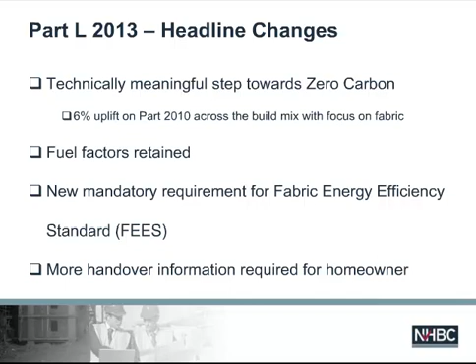With the new recipe approach, one of the things you need to consider is that we've stopped what we started in 2006, where we had a percentage improvement over a notional dwelling—then for 2010 we had a 25% improvement over that. So we were having improvements over improvements, which meant we had some fairly strange results where the same fabric specification would give a very different result depending on the type of property it was applied to. With the new notional dwelling setup, you're comparing your actual dwelling to a notional dwelling that is the same size, same dimensions, but has this new fabric spec applied to it, and that evens the playing field. So you can basically use the same specification and see very similar results across the board on your house types.

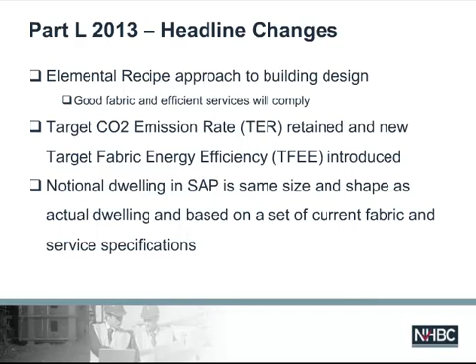So we've introduced the fabric energy efficiency standards into the 2013 regulations, first introduced by the Zero Carbon Hub as part of their minimum fabric requirements. The easiest way to think of this is it's the stuff you can't really take out of the house - the fabric, the thermal bridging, the air permeability. Things like low or zero carbon technologies don't affect the fabric energy efficient performance. That's really important to note - once you've started building your property for fabric energy efficiency, you're pretty much there. You can't have any bolt-ons later on that will help you achieve your target fabric energy efficiency. So it's really important to get your fabric energy efficiency sorted before you start on site.

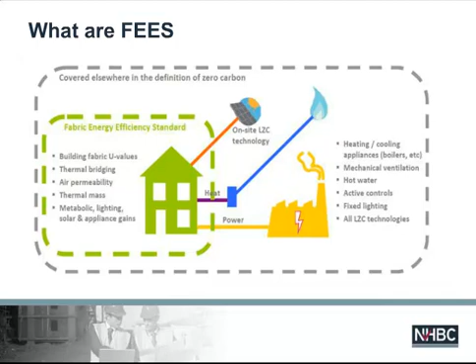In terms of the 5 criteria for compliance, we still have what looks to be a very similar set of requirements. Number 1, achieving the target emission rate. Now there is the target fabric energy efficiency, which is created from that recipe, which I will show you in a second. The limits on design flexibility, those backstops, those area weighted average U values, are still there. The wall average U value of 0.3 is still there - they haven't reduced those. Limiting the effects of heat gains in summer.

Now that's changed slightly from solar gains, meaning you do have to consider heat gains from pipe work - uninsulated pipe work that's carrying hot water. You do have to consider heat gains for that as well. Obviously, we also have the building performance consistent with the DER, and the design target fee, which falls in with the zero carbon performance gap work. It's kind of a leader into that, making sure that we are building what we said we were going to build at design stage.

And then number 5, it's the provision of the energy efficient information of the dwelling - some kind of home user guide to provide the building owner with how to use the services that you've installed.

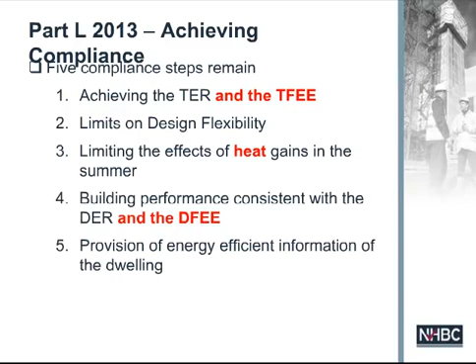So if we take a quick look at the recipe - and I know presenters after me are going to go into more detail on this - effectively there is now a recipe for Part L 2013 that if you build to it, you will comply with both the target emission rate and the target fee. You will actually slightly overperform for the target fee because there's a relaxation. So if you build this recipe, you're guaranteed to meet the target emission rate. However, you can build slightly lower specification in this recipe and still meet the target fee.

However, it does seem quite a simple thing - you just build to these U values. You do need to bear in mind that there are some very strict thermal bridging values, the psi values in Appendix R, used to work out your thermal bridging value, that if you can't adhere to, you are going to have to do something else. So if you build exactly to that recipe with your walls and windows, but your thermal bridging is bad, you are going to really struggle to comply with both your target emission rate and your target fee.

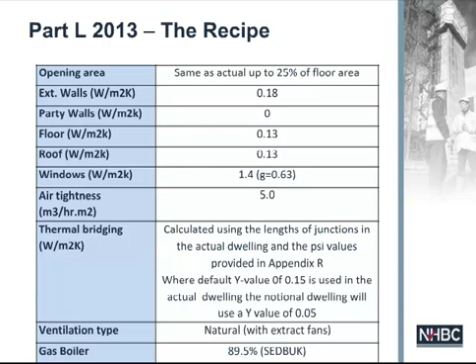So just to finish, I want to talk a little bit about thermal bridging. I'm sure the presenters after me will go into more detail, but just to cover where we are and why thermal bridging has become so important. You can see the house on the left has got the default Y value, which is where we were when we were looking at SAP 2002. The Y value of 0.15, default value - if you look at that as a hole in the wall, it's basically equivalent to a double garage door. Think about how much heat you're going to lose through default Y values. That's why it's really important.

Secondly, Y value of 0.08, that's accredited details - we are basically getting down to an open patio door, and that's where we've been for a while in the industry. But now looking at Appendix R values, we are actually closer to a Y value of 0.03 with all the Appendix R psi values. That's taking that opening, that hole in the wall, down to a small open window about 1.25 meters squared. So the challenge for you is to get that garage door down to that small window opening. And if you can't do that, you're going to have to do a lot of other things to get down to your target emission rate and target fee.

That's it from me. I'm going to hand back over to Vern now, who I think has got a poll question about the changes to Part L. Thank you very much.

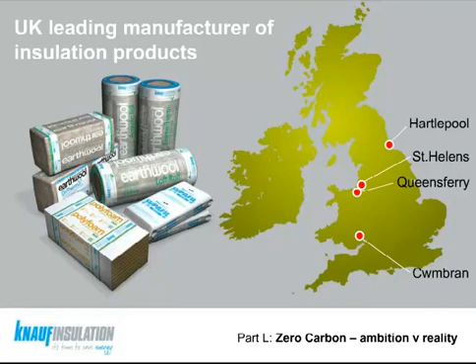What we've done is focus largely on the TFEE element rather than the full SAP compliance in this discussion, because that's the bit that really interests us and that we can have a major impact on. That said, of course, the DER compliance is required.

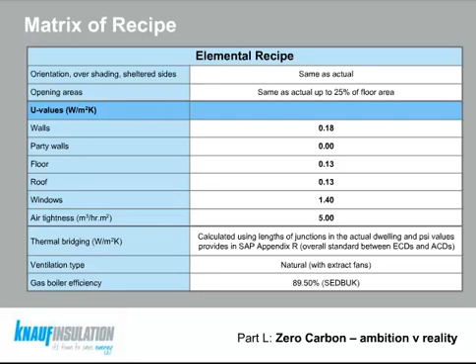This is the recipe that Richard described for calculating your target fabric energy efficiency, and we have done quite a bit of modelling to work out what our solutions would be in terms of U value.

In the current version of Part L 2013, there is a 15% relaxation of the TFEE, and we anticipate that a large number of builders are going to seek to bridge the step to achieving the full TFEE by taking advantage of some or all of that 15% relaxation in TFEE.

We have modelled to DER taking advantage of that, and for a semi-detached property we've come out with this recipe of U values. Of course, the numbers in there can change, and you could have a lower wall U value and a higher roof U value and still comply. It's dependent on built form, and it would also be dependent on issues like thermal bridging and also thermal mass parameter as well, which is something I'll talk about at a later stage.

What we've also done is modelled what U values you would need to achieve the TFEE if you didn't want to slavishly follow the recipe, and again we've got some flexibility there. By choosing options that give a better result in SAP with regards to thermal mass parameter, and also by having better thermal bridging details, we're able to find some options where it's possible to have a higher U value than is in the recipe.

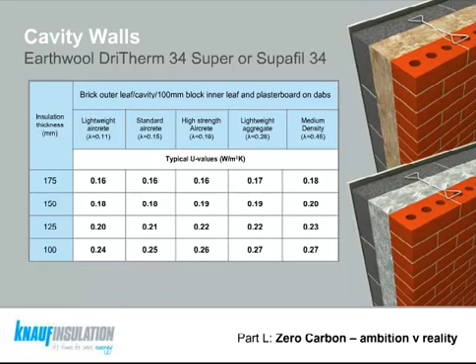Moving swiftly on to party walls - this is an area very close to my heart, I spent a lot of time working on the development of solutions for this, and also researching, involved in the basic research that identified these solutions. We've got fully compliant solutions with robust details for both built-in and blown insulation.

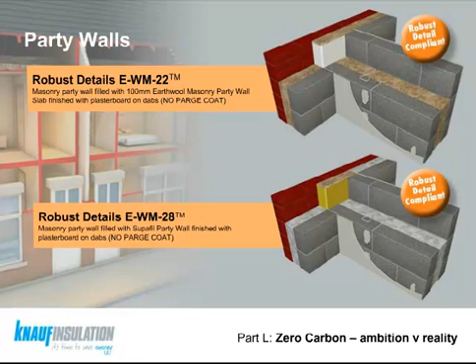For lofts, we are targeting U values of 0.11 in the loft. This is leading to 400mm if you use the current loft roll, the main widely used loft roll product, Loft Roll 44. With a slightly improved product, we can get to a lower U value of 0.1 with 400mm.

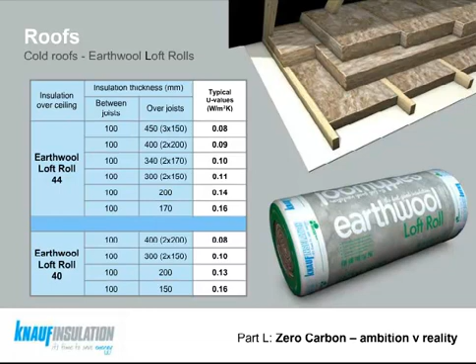For floors, this is a slightly difficult area for us because we manufacture undoubtedly the best type of product for general flooring, being an extruded polystyrene, in that it has the best strength characteristics and moisture absorption characteristics, but it doesn't have a particularly competitive thermal conductivity. So we are at high thicknesses of extruded polystyrene for this application, but we think that with proper engineering it would be possible, taking into consideration compressive creep and the characteristics of the product, to reduce thicknesses of slabs and screeds if a structural engineer was examining these solutions properly.

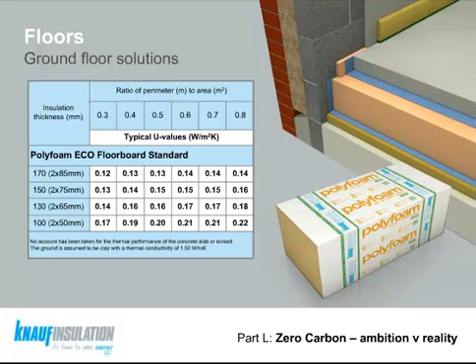With thermal bridging, everybody's going to spend a lot of time talking about it. It's absolutely critical because it's possible to leave a lot of performance on the table if you don't attend to your thermal bridging correctly. We have our own in-house qualified modelers for thermal bridging, and all of our modelling includes the best thermal bridging that we possibly can do, but we have made judgments about buildability in our details as well, because we're thoroughly conscious that people have to be able to deliver these details in real circumstances, and there's little point in having a fantasy detail that performs far worse than the calculation.

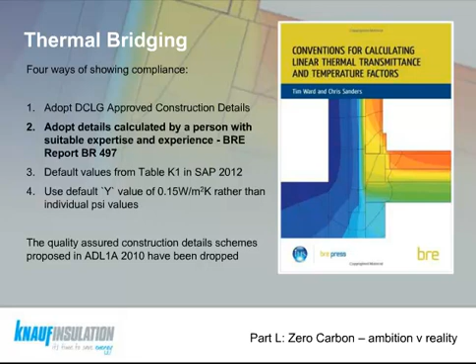Thermal mass parameter is interesting because it does make quite a significant difference, and generally the SAP program rewards low thermal mass. I guess it's anticipating that quicker heating from startup and less thermal lag is going to drive reduced energy consumption. So lightweight constructions are rewarded for thermal mass parameter.

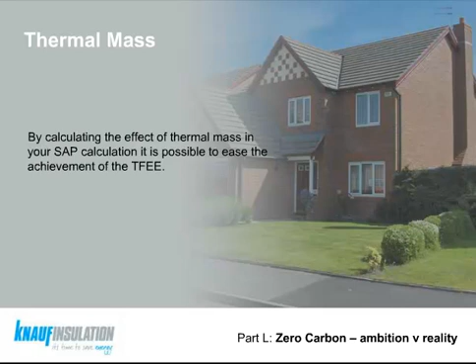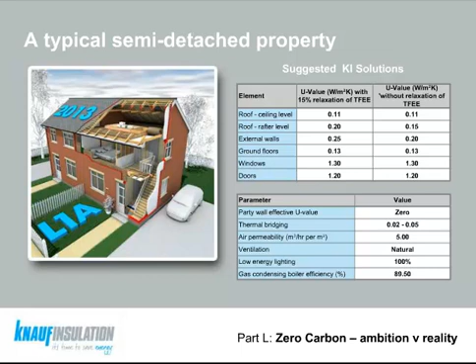So returning to our recipe, these are the numbers that we've come to develop the solutions, and we have a wide range of services available to specifiers. Importantly, all our calculations are issued under a certification competency scheme that's run by the BBA. So that's the end of my presentation. Thank you very much, and I'll hand back to Vern.

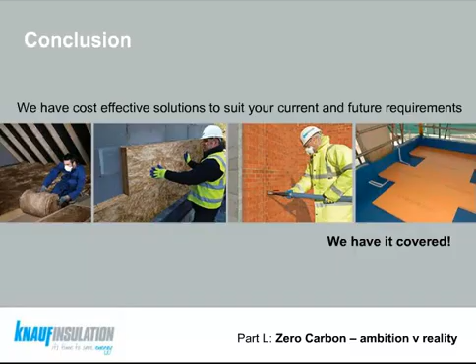Okay, let's see the results of that. Seems to be a toss-up between buildability with 33% and energy efficiency with 37%.

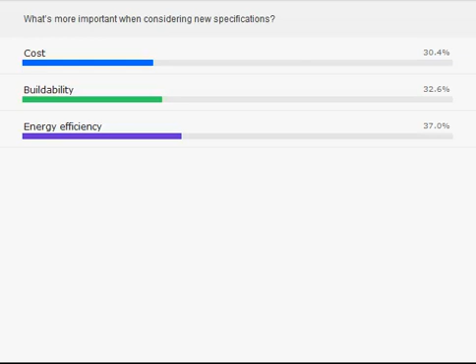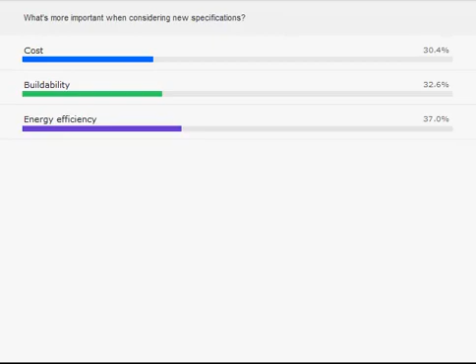So I'm going to touch on the topic of the performance gap and how it relates to the new Part L and the Part L to come. Before we start, a few words about the Hub for those who haven't heard of it before.

The Hub is the leading organization paving the way to zero carbon houses for England from 2016. We work very closely with the government and the industry, disseminating relevant information and trying to clear any obstacles that you can find in the way. Now, at the moment, we're mainly focusing on new homes.

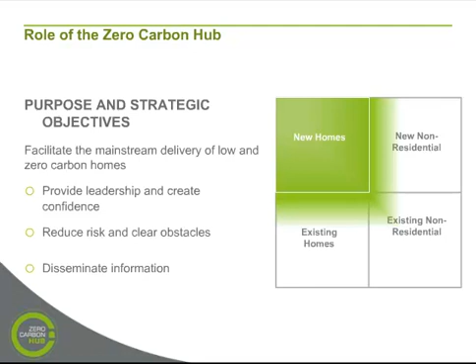And speaking of zero carbon homes, I hope you're quite familiar with this pyramid. This schematic shows how an approach to a zero carbon home can be achieved. It's a three-tier approach. At the very bottom is the fabric energy efficiency, as was described before by Richard, which means that you have to have a very efficient thermal envelope that will meet specific requirements. According to the proposed definition as developed by the Hub, there is a maximum energy demand based on the different housing typologies that you have to achieve, which is quite fixed, and slightly different than the target of fabric energy efficiency introduced in the new Part L.

As a second step, there is also a specific level of performance when it comes to carbon emissions and how much carbon you are allowed to emit from this property. Again, based on different housing typologies, these figures were calculated by the Hub. This is another way to verify that you have achieved specific levels of performance on site before you move to the third step, which can be described in general as a financial way of offsetting carbon off-site through, for example, investing in carbon reduction projects and then allocating this carbon reduction to your project. It is very important to say that in order to access this third element of the definition, first of all, you have to achieve on-site specific level of carbon performance.

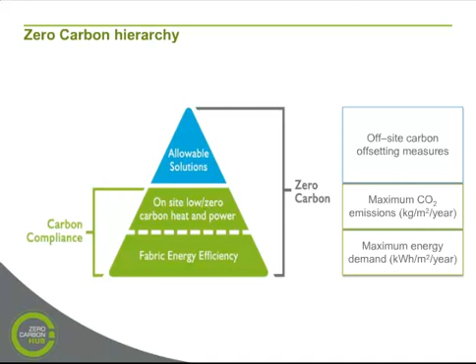So, moving on, some of the highlights when it comes to Part L 2013: we have seen a 6% overall aggregate improvement in carbon emission targets compared to 2010 regulations. The other important element is that we have seen a reference to fabric energy efficiency performance, introduced in the form of the target for fabric energy efficiency. This is slightly different from the fabric energy efficiency standard because it's not an absolute figure. It relates to shape, form, and comes from the concurrent notional building, and this is how you compare, but we are very happy to see that there is now a way to actually evaluate the performance of fabric in these new regulations.

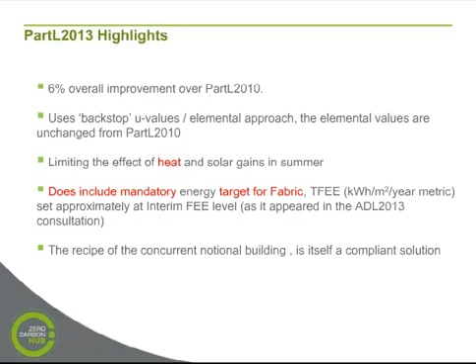Historically, the improvements in the different versions of the building regulations and the actual target for 2016 show that we have made a lot of progress since 2002, with various improvements over the previous versions of the regulations when it comes to carbon.

The 2016 target remains that we will have to achieve zero carbon emissions from regulated energy use only. As you can see from this graph, we are almost halfway there, but we have to highlight that all these changes to the building regulations focus on fabric. As I explained before on our pyramid, you can actually minimize carbon emissions through other measures, for example on-site low and zero carbon technologies or renewables. So we're not as far as you may think, but we still have some ground to cover before we achieve this target.

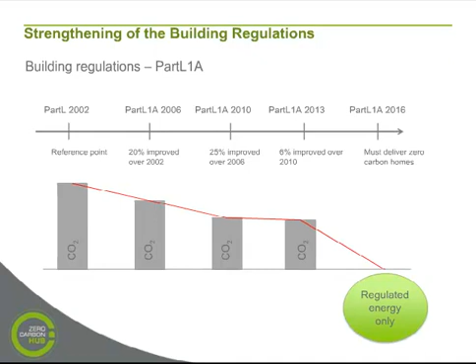Coming back to the previous topic about the performance gap, in our journey to zero carbon we have been focusing on the different elements of the definition. This was picked up in 2011 by our task group committee working on carbon compliance levels, who found there is a hidden risk for the future: what we actually build doesn't perform as well as it was designed to perform. These findings were reported, and the recommendation was that from 2020 onwards, the test result distribution should demonstrate that at least 90% of all dwellings would meet or perform better than the designed energy carbon performance.

This is really crucial and very important, because no matter how the building regulations change, if we are unable to achieve these carbon savings on site in the real world, all these carbon savings will remain on paper, which is not making a big difference, and this is not the intent.

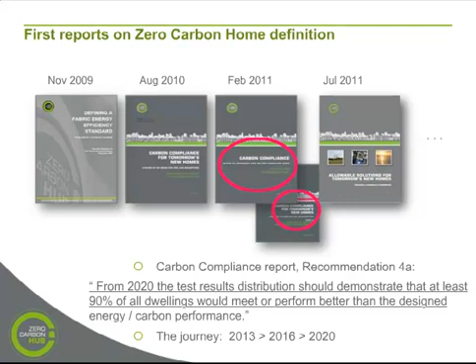So what do we think when we hear this word, the performance gap? How do we know there is a performance gap? Usually after construction has finished, we can run some tests, and then we can see that the performance is not the one indicated in the design. This creates confusion around where this performance gap occurs, and a lot of people would say, oh yes, something went really wrong during the construction stage.

But to be fair, there is a bigger knowledge gap that spans throughout the building process, and this is what we really want to focus on through our work, because all the different stakeholders and players involved can create small shortfalls that, if you add them up, will create a bigger gap.

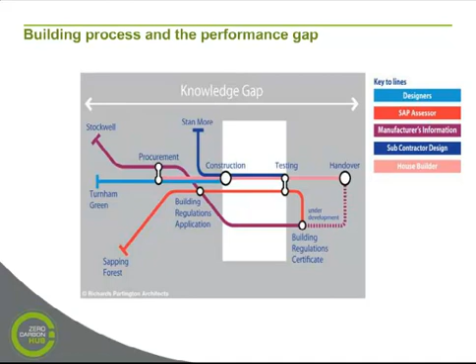So for that reason, and trying to move things forward, in January 2013 the hub, with support from industry and government, started this performance gap project to identify and understand where these gaps occur and what the risks are for the future. By July 2013, after working with more than 140 individuals in different working groups, with support from more than 90 companies and the government, we held brainstorming sessions and workshops, and produced the first report with initial findings and initial thinking on where these shortfalls may occur.

Furthermore, very recently in March 2014, after collecting and concentrating evidence through literature reviews, site visits, and other information streams, we produced another report that is well evidenced, showing the different issues across the building process and some potential solutions and guidance. We expect a third report this summer that will focus even more on the different aspects of the issues, with extra site testing, looking at different delivery processes for large and small builders, and probably some sensitivity analysis.

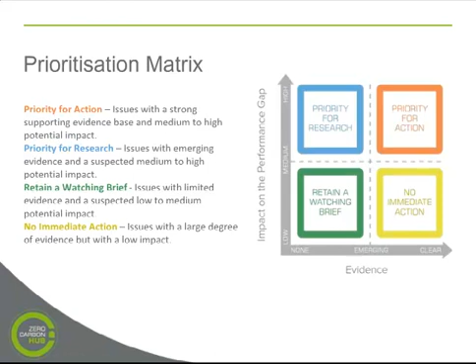So in the second report with the evidence, we came down to 15 identified issues that, as I said before, span out from even the early stages of concept and design down to verification and testing, and not only the building stage but the construction stage. These are the priority for action items, and they are discussed in the report with specific information and details.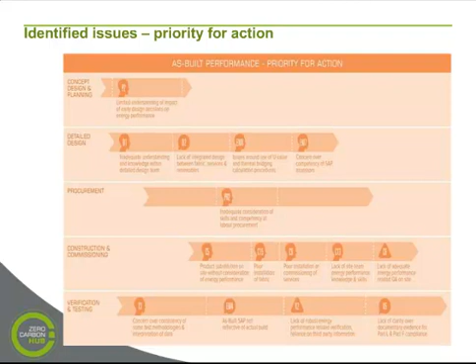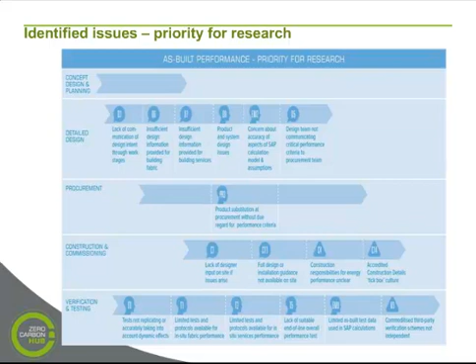And 17 items were identified as priority for research. The 15 previous issues made it possible to develop comprehensive solutions in the near future that can be led by the industry, or if necessary, include government intervention. The other 17 relate to lack of knowledge, usually within the testing and verification area.

So closing this brief on the performance gap, I just want to include a design detail that we noticed on one of the site visits. It's not one of the most important issues, but I think it highlights very well how things can go wrong. For example, from a designer's perspective, this is a detail that he will design, maybe because of planning requirements, maybe for aesthetics, but it's a hard detail to construct on site.

Consequently, the SAP assessor may miss some of the thermal bridges, and if building control is also visiting the site, depending on how much visibility they have over this junction, some things may be missed. All of this contributes to the performance gap.

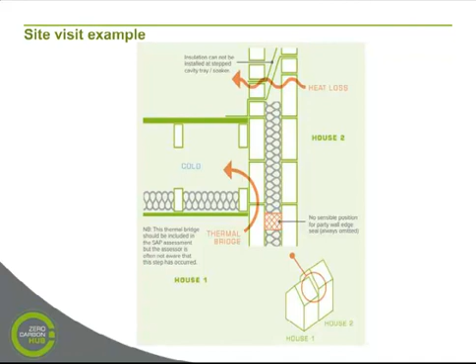So I think this is about it, and I just want to advise you again to log on to our website and download these reports. They are very useful for Part L 2013 and the future versions, because we have to verify that the product we develop is actually performing as well as it should. So back to you then.

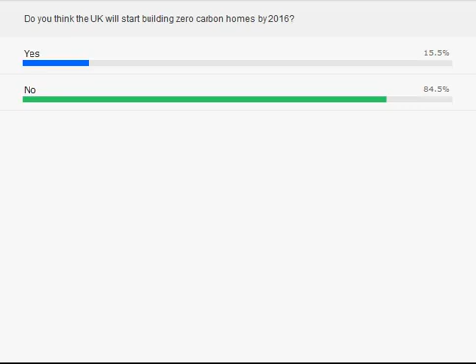Very quick word in response to that question - the policy actually states from 2016. It recognises there is always a lag behind when regulation is introduced, so it's to be expected, I suppose. But nevertheless, I guess we're behind the curve in some ways.

Just a quick word about who I am and where I come from. PRP Environmental is a specialist multidisciplinary team of about 15, operating within the wider practice, made up of architects, engineers, economists, and sustainability experts. It covers a broad church of disciplines and experience, ranging from the usual environmental services right through to some of the more specialist services we're now delivering for some pioneering clients.

I'm going to talk a bit more about the design implications of what all this means. Before I get into that, I think it's worth casting forward to understand the context of where we're going to. You've heard a bit about the zero carbon policy from Tassos - a reminder of this triangle that was created 4 or 5 years ago when they came up with this policy.

The implication of that is that we will certainly have other low carbon technologies on virtually every new house that is constructed to satisfy that policy requirement.

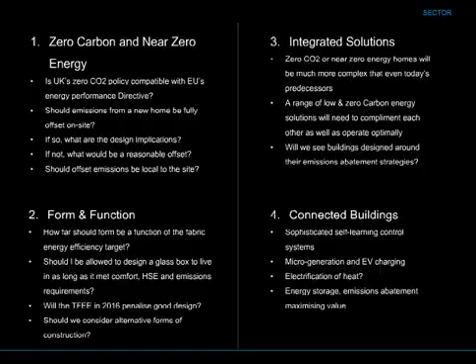So let's think about form and function from a designer's perspective. You've heard a lot about the importance of thermal bridging, and this is now emphasized through the compliance regime. In simple terms, what does this mean for the designer starting with a blank sheet of paper on a new scheme in London or wherever it might be? I've got a few bullet points here I'll run through.

Key, I guess, should be the ratio of exposed area to floor area. So if you have complex shapes, lots of abutments, integral garages, or a bungalow for example, it's all going to get harder.

Large windows, which we're all fond of since we like daylight, are going to make it harder. Higher ceilings will make it harder too. All of these things now need to be factored into your decision-making process, and even better would be to model some of this early on so you understand the impacts and scale of impact of these issues.

There will be a huge emphasis on measuring those thermal bridging details, and developers with the funds to do so will probably value engineer this to the nth degree to exploit the opportunity that the 15% comfort factor allows at this point in time. But inevitably that will be squeezed going forward, one assumes.

A couple of other points - balconies. We're all under pressure to provide external space for people. Thermal breaks on balconies, particularly cantilevered ones, are essential. If you can avoid it by having structurally independent balconies, even better.

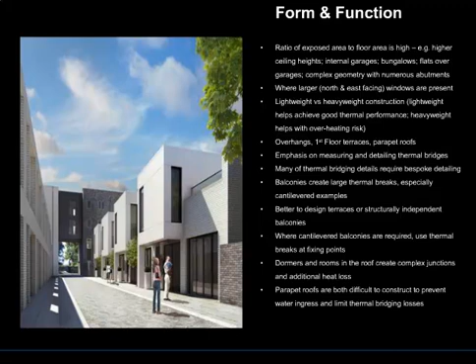What does that mean in terms of design impacts? You'll start to see drawings produced by architectural practices which look at these details now and really explode them out so people are aware exactly what's involved.

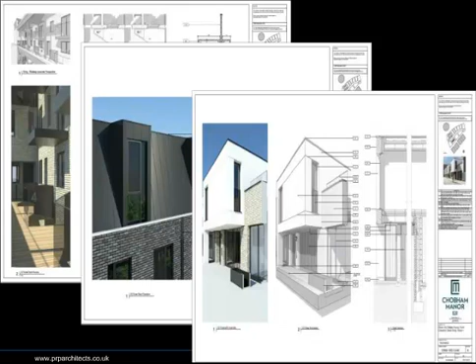This is an example from a scheme we're working on for the London Legacy site, where they've adopted the previous incarnation of the fabric target - full FEES, which is a harder, absolute target to achieve. So we've gone into a lot of detail modelling those unit types. Here's an example of a terrace from that scheme - pretty plain in shape and geometry, albeit with one or two abutments, but you can average that terrace across its length, which partly allows us to get over the line in this case. But is that an indication of the shape of things to come?

Here's another example of a project we were involved in, known locally as the £100 house project, where the target was to design a house with a space heating bill of only £100 a year. It's being monitored at the moment, I think by Aberdeen University, and you can see here the fairly boxy, plain-looking shape of these buildings, which went a long way to satisfy that ambition.

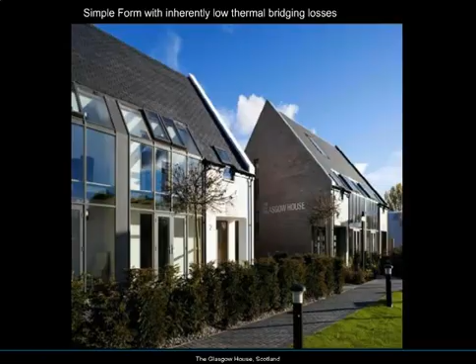I think it's also worth considering what Passive House drives you towards as a possible proxy for achieving these high standards in the future.

It's also worth considering alternative forms of construction. This country is pretty wedded to cavity wall construction using masonry, but this may be the time when this driver in particular starts to create demand for alternative techniques. The one on the left is a light gauge steel system that Rockshell have developed, designed to achieve a sort of passive standard. The one on the right is a thermal clay block system largely used on the continent. It's inherently low in terms of thermal bridging, pretty good insulation levels too, and you can also add further insulation on the outside, which to my mind is a better way of doing things.

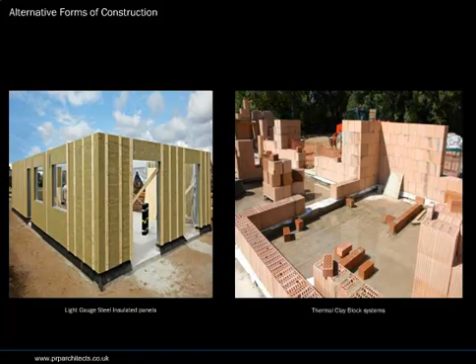And then there are other systems you might want to look at too, things like ICF, insulated concrete formwork—a bit like building with Lego in my mind, but again very low thermal bridging, and once you crack this and get your guys on site to understand it, it's a pretty simple way of constructing. The other is obviously some form of timber frame. This is a structurally insulated panel, again low thermal bridging.

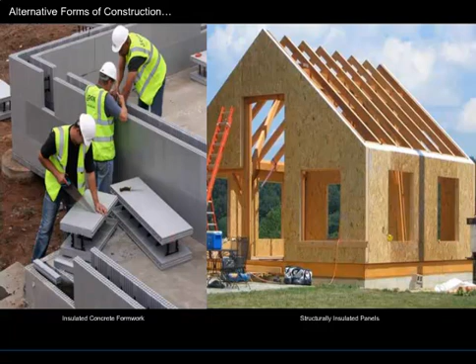Moving on, it's worth thinking that isn't the end of the story. We've got to start plugging in all sorts of technologies, and at the moment the technology of choice is solar PV in particular, partly because the price reductions continue to happen, and it's likely to hit grid parity, as they call it, probably within the next 5 years, possibly sooner. That is, it'll be cheaper to generate your own electricity using PV than to buy it from the grid. But arguably what we're seeing at the moment is what you see on the left, a fairly ugly eyesore in terms of panels bolted onto an existing roof.

You may spend a fortune on nice clay tiles and then you cover it in this stuff. But I would like to see something more on the right, where your roof effectively is the array and it provides the full structure too. So maybe we start to see that coming through the market. One hopes we will.

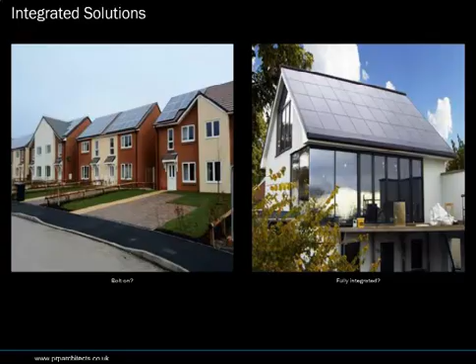And lastly, I think perhaps even further forward, we'll start to see far more sophistication within the dwelling to make all these systems complement one another and ensure that we are delivering on the targets that have been set for us. So you'll start to see control systems that learn how you behave. You're already beginning to see this—Nest is an example. Google bought that company for whatever it was.

They'll cover all of the systems within the house, not just your electricity generation, but all of the things. And it will even possibly give you the smart travel choices from your dwelling to wherever you might want to go and so on. And dare I say it, your fridge might start ordering your food too.

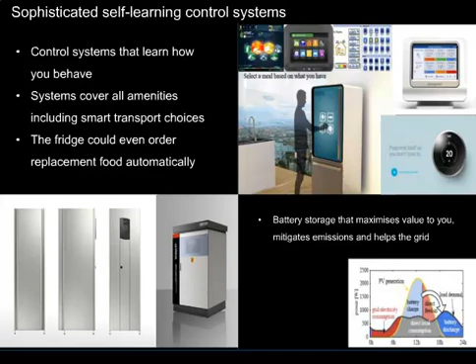The other thing you might want to think about is that we'll probably have some form of energy storage coming through, so you'll need to find space for that. The Germans are already looking at this in a big way. The storage facility will not only capture your generation, but it will also effectively sell that excess generation at the optimum time, so that we will seamlessly integrate with a smart grid system. It helps the grid because it reduces peak demands, but it also allows you to maximize value by selling it when electricity is most valued. That's what your storage systems will begin to do. The Germans are already doing that because their government incentives are incentivizing them to do it.